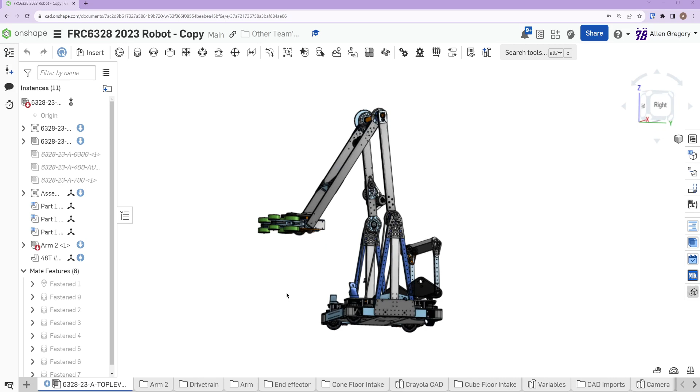Tonight we're looking at Team 6328, Mechanical Advantage. They had a fantastic robot this year. It was rather cool, so we're going to look through their CAD and see how they did it. Just like the robots in the design recaps, we'll go mechanism by mechanism, normally starting at the bottom and going up.

Looking at their swerve drive, it's very similar to our drivetrain for the two robots we built this past year, where they have the same swerve modules, the MK4i inverted modules. They are using NEO motors instead of Falcons, but that really doesn't change much in how the modules get built or anything else. They have the little 3D printed corners that we also use.

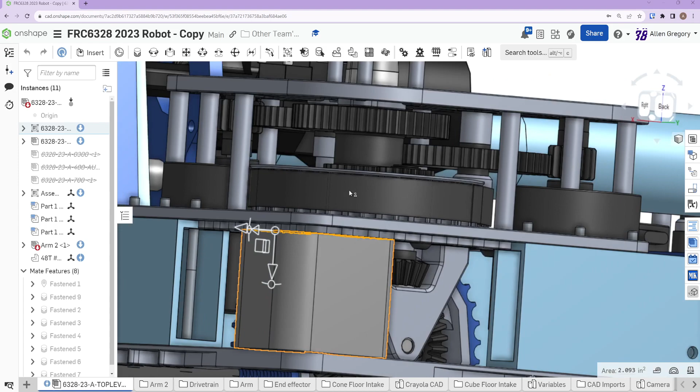Theirs are a little bit different actually, which is interesting. They go around that center standoff, which might be something we do. We currently wrap it with the 3D print where we just have a circle and we press it in, so it's the only bolt that goes through our little corner, where they just come in and put two more standoff features into two outside bolts. I wonder if they drill into here. We had considered that on one of our setups for a couple things. This flange is a little bit thin, this web here in the part.

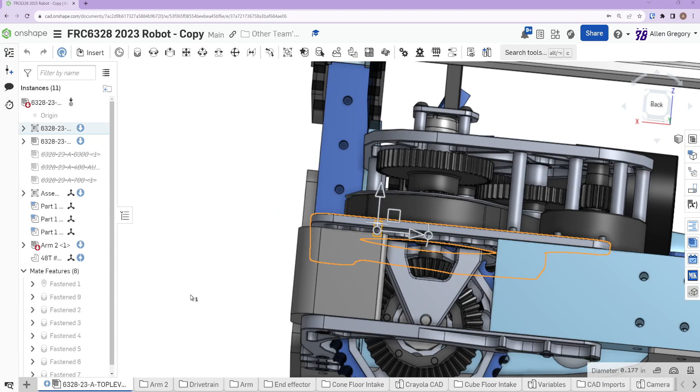It gets milled out by SDS when they ship it, but you can drill and bolt into that, so they could do something like that. Because this is a threaded hole in the SDS module, so there's a bolt going down into here somehow. I don't know if it goes all the way through. They might just bolt it into the 3D printed part. You could do that if you wanted to.

So those, it's pretty decent. Oh, it's on the other side, there's the hole. So it's a relatively wide hole, a .266 hole on the inside here. So what I think they do is this part gets an inserted nut. Yeah, it has that little recess here, so it's probably a heat set insert or a screw expand insert that goes into here, and then they just bolt those in from the top of the module, so there's nothing supporting the bottom most likely.

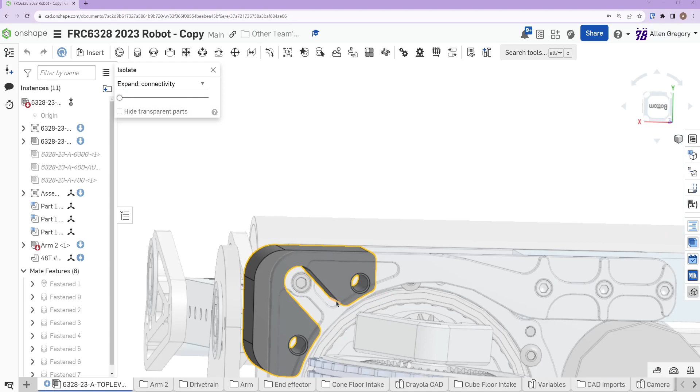They could put another insert and drill a hole, but that'd be really hard to do right here where it hits the rib, so they're probably not doing that, at least on this side. But you don't really need to, this doesn't have to be anything all that structural. Just bolting in from the top works pretty well, and then you don't have to remove the standoff to take it on and off, which is pretty nice, and you can make this part a little bit simpler to make.

It's just a single 3D printed part, that's a little bit easier. We might actually start doing something like this, it saves some time, because we had some issues with ours breaking and stuff. These would be easier to replace if you just undo those two screws.

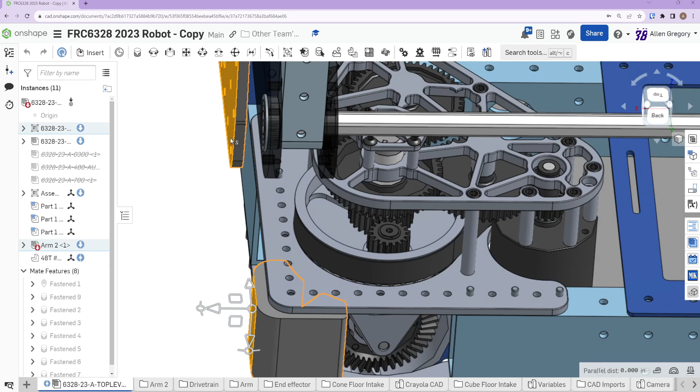That is a small feature, but already pretty useful and cool. So what these things do is help make your frame perimeter flat out to here, so you can meet all the bumper rules about how close your bumpers have to be to the frame, and how many gaps you can have in things. These corners fill out your bumpers a little bit, and make it much easier to be compliant without having to change your bumper geometry. They only pushed it out on one side where they have this plate. They left it small on the other side because it's fully flat back here, there's no plate mounting here, so they just left it basically flush with the swerve module. So that's pretty easy to do.

They did a somewhat similar battery mount to what we normally do. We don't have this rail crossing here, so on our robot we have to have little standoffs coming off, but having the rail makes it really simple. You're able to put the battery right there and strap across it.

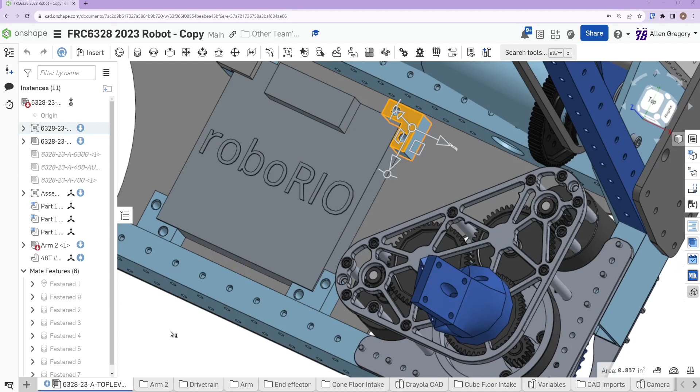Let's see, yeah, they have some of their other electrical. This is an interesting way to do the RoboRio. These little blocks kind of frame it in, and then they have smaller blocks that they screw down on top of it to basically clamp it down. For the most part, we just use VHB tape, double stick tape, on the bottom of ours, and stick it down, and it holds up quite well. We haven't had any issues. But something like this would make it easier if we ever had to swap the RoboRio. Having to pry up the VHB tape is kind of annoying. Where this clamping setup, you would just undo some screws and you could swap it in and out.

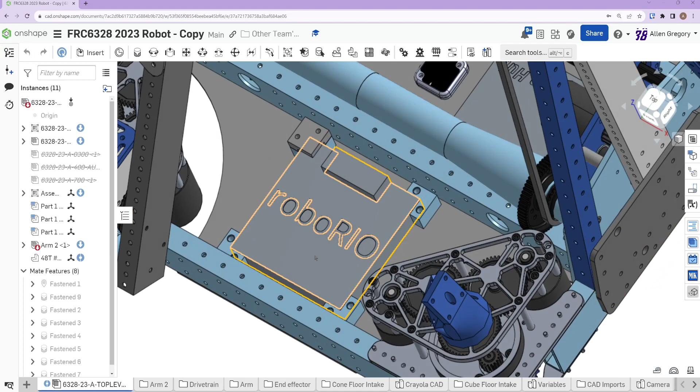So that would make the repair a little bit faster. Most of the time, if we have to swap a Rio, we probably have enough time to either pry it up if we have long enough in between matches, or we might just put another one on top of it, plug things in, and go to the match. We normally try to have at least a little bit of weight margin so we can do that without being overweight. So you can just unplug everything, plug it in on top, and strap it down with VHB or zip ties or whatever else you need to get it to at least stay for a match.

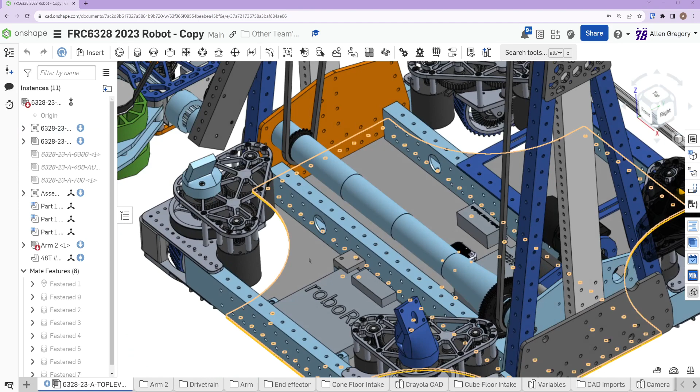Looks like they also had a steel belly pan, either steel or aluminum. Probably most people's this year were steel. 1/8 inch could be steel or aluminum. We could go check if we really wanted to, in like weight properties. See if it shows up. 6.7 kilograms. So I'm not sure if that's steel or aluminum still, but either way it would work. So if you need some extra weight down low, you could make it steel. If not, you can make it aluminum.

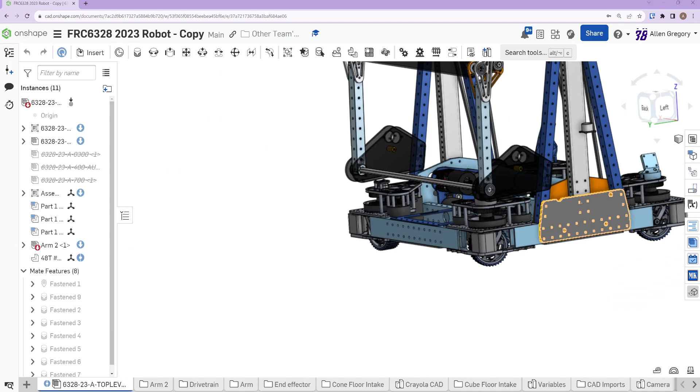They have these full circular arcs down here where we have kind of like straight line cutouts, but nothing too different. Where they actually start getting quite a bit different is where they mount their superstructure. They build it all off these two main plates on each side that pretty much mount the whole rest of their superstructure. So their chassis is basically fully separate. Instead of having that whole mounting rail system or mounting in multiple places of the chassis like we did, they just have four rather large mounting plates that build up a support rod on each, like a 2x1 vertical support.

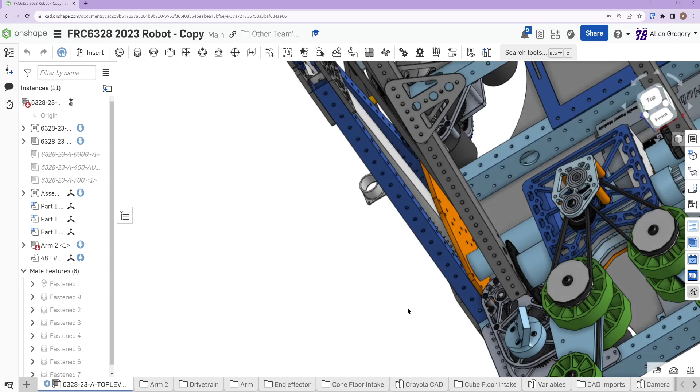And then the two angled A-frame supports in between them. Let's see, so they're not too much longer. Yeah, so they're actually pretty small. This robot's 25 by 25, so it's pretty narrow. Ours were 27 by 24, so we'd have a little bit more room between our swerve modules if we wanted to do something like this. You could have these tubes be angled out a little bit more for a little bit more support, and these plates would get a little bit bigger.

So that's the structure of what is their arm supports, but we're going to skip over to their intake. This is actually really useful for a lot of swerve drives and swerve designs. Something like this could help a lot, because one of the tricks we talked about for our off-season robot was how do you actually mount over the swerve modules. It's often pretty complicated with the MK4i because you don't have a lot of mounting support up there. There's some teams who will use nut strip mounted to these bolt holes on top, and then you can mount some plates onto those.

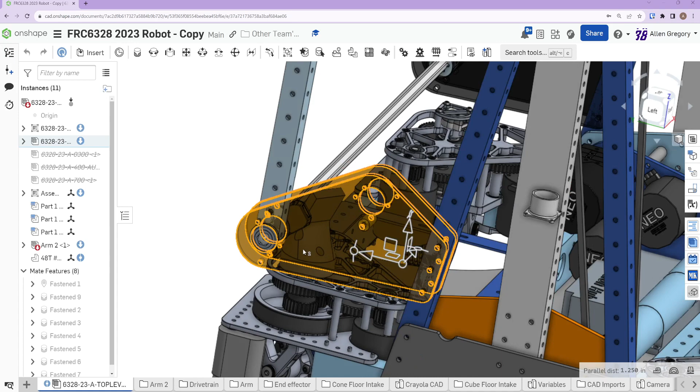That works a little bit, but then everything's integrated into the swerve module, so if you ever need to replace the swerve module, you're unbolting parts of your robot to do that. Even maintenance gets a little bit harder as you bolt things to the swerve module — it's harder to get in, keep it clean, and swap belts or anything when there's stuff mounted around it. So these polycarb plates that they have mounted to the A-frame are able to just overhang the swerve modules enough to be the pivot for their cube intake.

This is rather simple, and it works pretty well for any game object where you can have this high of a pivot.

They didn't need to try to drop it any lower down near the swerve module or anything. It's hard to get too much lower than the swerve module anyway. They can only go a little bit lower if they wanted to, but this lets us have the shaft pretty close to the front of the robot and still reasonably supported.

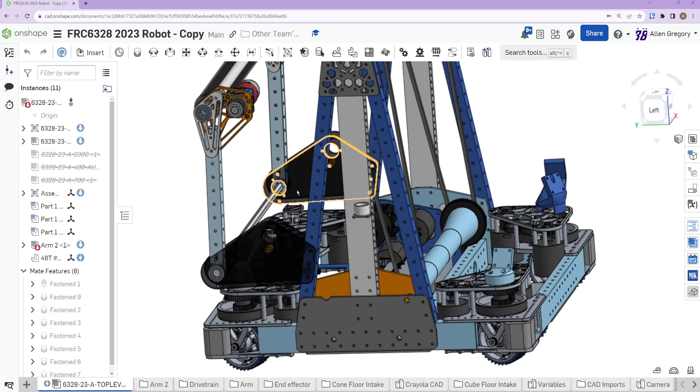By those modules. And because you have these polycarb plates, you get a little bit of compliance built in, so that if something does come in and hit this from the side, these plates are able to bend a little bit just because the polycarb is flexible, more so than aluminum. So they can take the shock pretty well. They can take the impact. Polycarbonate is very impact resistant.

And so you shouldn't have too many issues with something like this breaking. If you wanted to, you could stiffen it up with more standoffs across here. So they only have, in CAD at least, this one, and they just have the hex shaft running straight through it. If you had a standoff a little bit closer, you could make it a little bit stiffer between those as you make the sandwich. Have more standoffs between it. This whole assembly gets a little bit stiffer, which if you started to see too much flex, you could do.

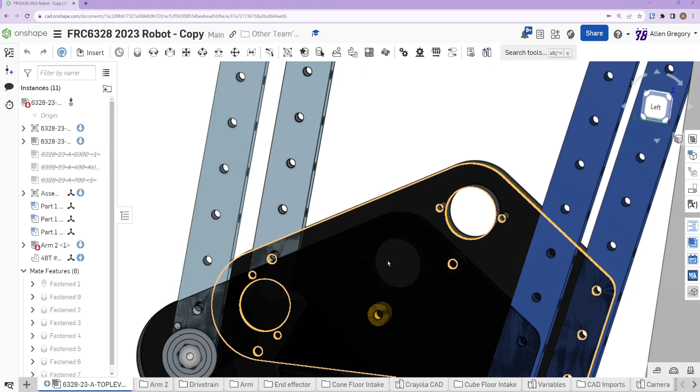It looks like they had another bearing set up here, so this might have been for a different iteration. This might have been for a motor mount of some kind. It's very possible they just designed in a different intake at one point that used another rod or something, so it got left over in CAD.

But they just kept it because this intake pivot still worked. But it doesn't look like anything's there, at least in the CAD, that's visible. So yeah, that's how the intake supports the pivot. How it actually works as an intake, from what we can see so far, is something has to power this hex shaft to be able to power it up and down.

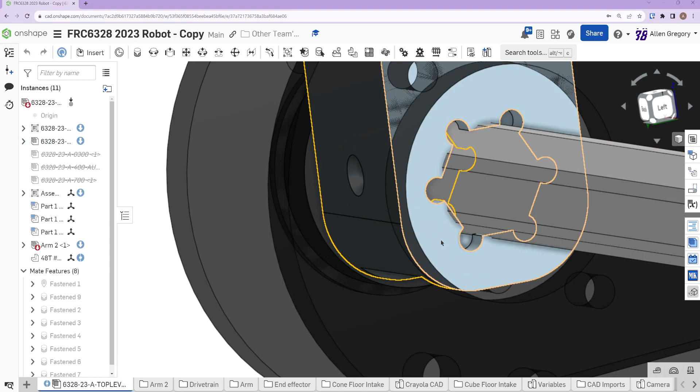So they make, oh, that's actually kind of cool. Let's see. So to actually be able to move it, on their router I'm guessing, they cut the hex profile into the tube directly. They have these circle overcuts because when you have a rounded bit on the router, you have a round cutting bit that's spinning. You can't make the sharp corner of a hex.

So they overcut into the corner with an 1/8 inch router bit with a CNC bit. They're able to do these overcuts into here. And so this gives space for the hex shaft corners to fit, or the rounded hex shaft corners to fit. And then you can transfer all the torque on all these flat sides to the 6 flat sides of the hex.

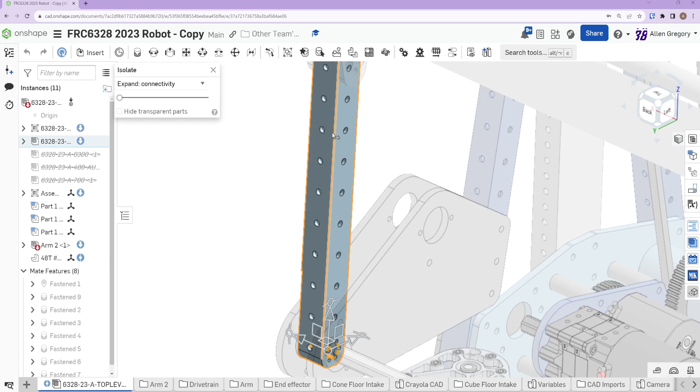And so as the hex spins, the arm spins, and you get a really tight, light package because you don't have to have any hub or anything, and you can still just run the 1x1 out to have nice, easy mounting and relatively strong structure compared to just a flat piece of polycarbonate or flat piece of aluminum. The tube gets you a pretty stiff structure out here that's very easy to mount to. You can just bolt or rivet. So cutting in the hex pattern on the router is a pretty clever way to do that.

What we don't necessarily know is how they actually power the pivot. So they have to have a motor somewhere to spin this. My best guess and what I believe is happening is this Neo and Max Planetary over here that doesn't seem to be attached to anything else is powering this somehow. So there's either it...

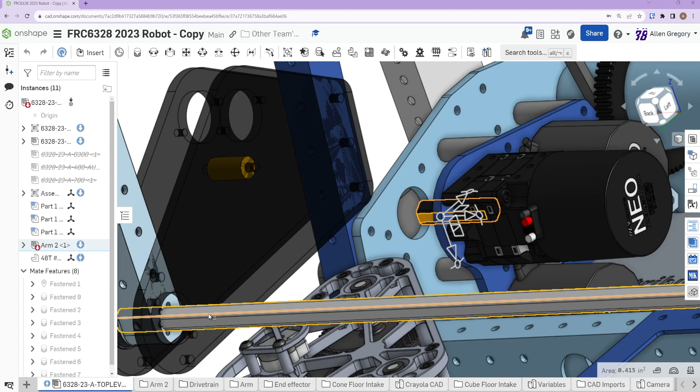Doesn't quite look like you can fit a belt directly here. So it's possible maybe that this is what that's for. This might be like an idler. So you have a shaft running through here that has a pair of pulleys or sprockets on it. And this shaft runs up to this one, and then this runs down to this. That's a very possible way that they're doing it.

They could also have a motor mount somewhere on here that just directly does it, that just didn't get into CAD. A lot of times things like that change throughout the season, so you don't exactly know how teams' robots work just from CAD, because not everybody's CAD is fully detailed everywhere. So even though they didn't CAD the chain here, we're almost certain just from context clues that something is powering this hex shaft. It just didn't get into CAD, or it's hidden in this version of the model, or something like that.

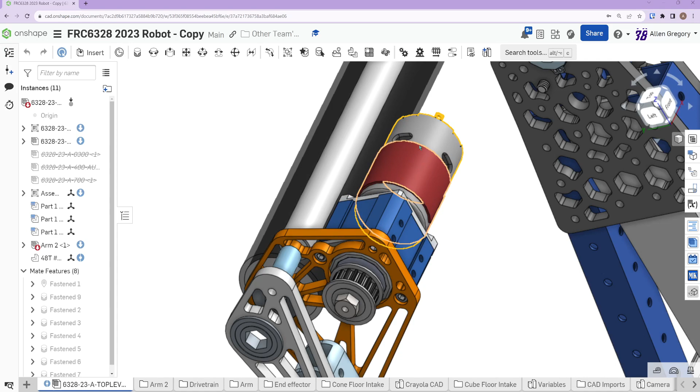The other part of the intake is the actual roller itself, and they chose to use a non-brushless motor. They're not using a Neo or a Falcon up here for their intake. They're just using one of the AndyMark RedLine 775s, which are similar, or at least similar in the model, to the 775 Pro motors. These were very common on intakes forever.

They're still pretty common on intakes. The advantage is they don't have any sensor wires, and you don't have to run the CAN bus out to this or anything. You just have to run power to it, and you can run the power back down to a Spark Max somewhere.

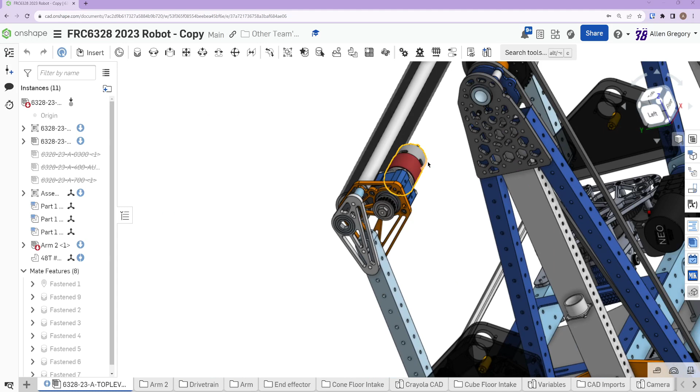They're just brushed motors, so they don't need any of that advanced logic or anything. You don't get the encoders or sensors that you get with a brushless motor, but it's a little bit lighter, a little bit easier to package, and there's less risk with fewer connectors or wires out here failing and messing up.

A lot of teams will use brush motors if it has to be all the way at the end of the intake, like this design is, where you have the motor gearbox right above the roller. When this is deployed, it's going to be pretty far out there, so another robot could run into it, or if you ran it into something exactly right and bent this bar, you might hit the motor. You may not want to have a Neo or a Falcon out this exposed on your intake.

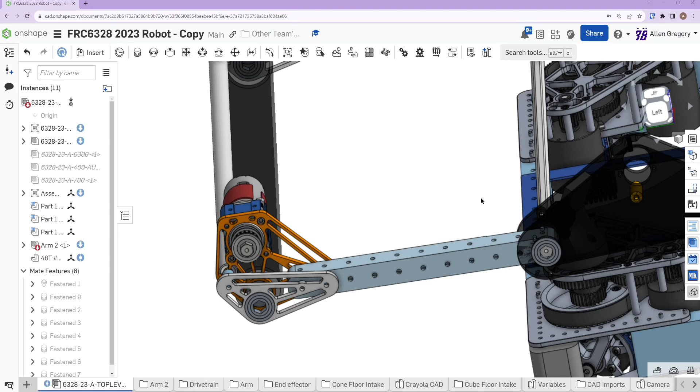A lot of times you do this just so it stays out of the way, so the cube's going to come up inside it, on the inside here. The cube doesn't ever touch the motor here, whereas if you put it farther back, the cube might run into it. So it ends up being nice and easy to put out here.

You also have a really short belt run. You have the belt on this pulley here. There would be another pulley that's not in the CAD or modeled in this version that we're looking at, so there'd be a pulley here and you'd have a really short belt. Short belts are great - it's very hard for the belt to have a lot of time to skip, because you can keep tension on them very easily.

What's the best way to describe this? The amount that it would need to stretch for it to be able to come over the flange is a much higher percentage of the total length of the belt. So it's much, much harder to get it to pop over a flange or come off a pulley when you have a short belt compared to a really long belt.

If you have a really long belt, every little bit of belt has to stretch a little, and then there's enough room for it to come over the pulley or to stretch, and it's just harder to keep everything in tension. It's much easier for the plates to flex between them, even if it's aluminum - it's still easy for them to get out of alignment just a little, and then your distances aren't quite the same. So it's much more likely for a belt over a long distance to come undone if you don't have other ways to tension it than for a really short belt. So you get some advantages there as well.

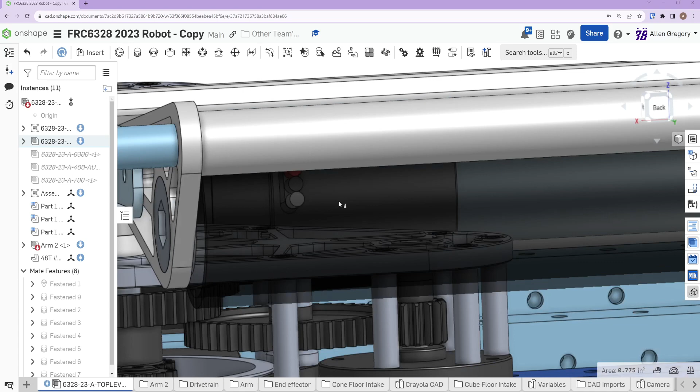Ooh, I rotated too much. Okay, it looks like their roller is just a live axle hex roller, so it's relatively easy. They have the 4 bearings - 1, 2, 3, and 4. There'll just be a hex shaft running all the way through it, and then it's like 1.75 OD or something. They build a hub of some sort.

2-inch OD, yeah, so this might be like 1/8 inch wall plastic - probably 1/8 inch wall polycarb tube, so 2-inch OD. Could be something else, could be rubber. But something's probably, if it's polycarb, there's probably something wrapped around it to be able to intake the cubes nicely.

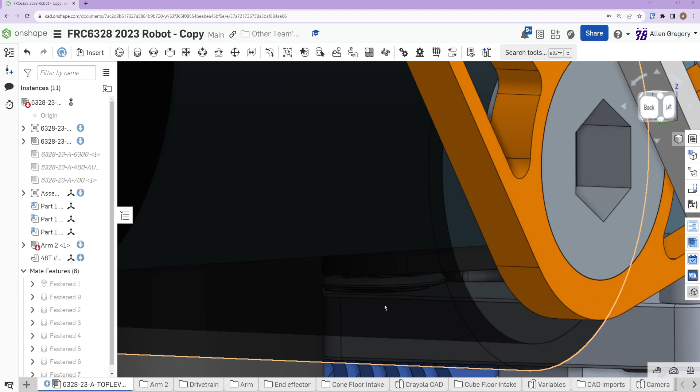And they have some version of a hub that they would put inside of it to attach it to the hex shaft. Normally those are just going to be printed hubs.

Some teams who don't have printers would use wheels sometimes. You would find a hex wheel that fit inside the tube exactly, and then you could screw into the wheel through your tube. You can make a roller that way. But nowadays with 3D printers, most teams can just print any hub they need and make it work very well.

The last part of the intake is this crossbar. So that's just a standoff here and a bolt, and most likely a star nut inside of this tube that they're bolting into. Star nuts are often used on parts of a bike sometimes, but you hammer them into the tube, and it allows you to have a threaded end right in this end of the tube.

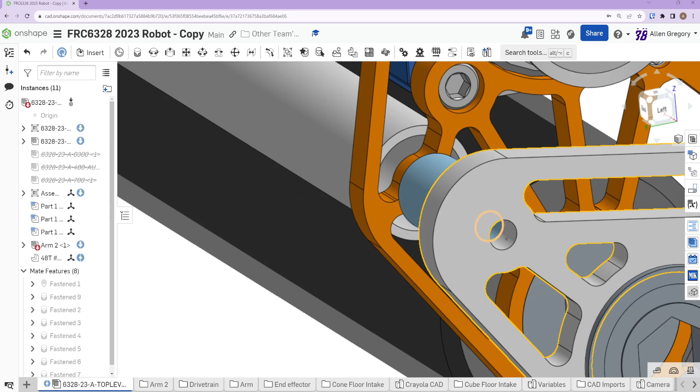It's a .196 hole, so that's a number 10 going through. So if they are using a star nut, they're probably using the Rev star nut, and this is probably a 3/4 tube. So my guess is this is probably a Rev star nut in here with the Rev 3/4 tube or any other 3/4 aluminum tube.

We had some issues with the Rev star nuts where we'd twist them inside if we torqued them too much, so we stopped using them, but other teams have had a lot of success with them, so they definitely work. They allow for a very easy, light, strong standoff going across your whole intake to give this thing structure, so this whole part doesn't rotate, and keeps both ends in parallel so that they move up and down nicely together.

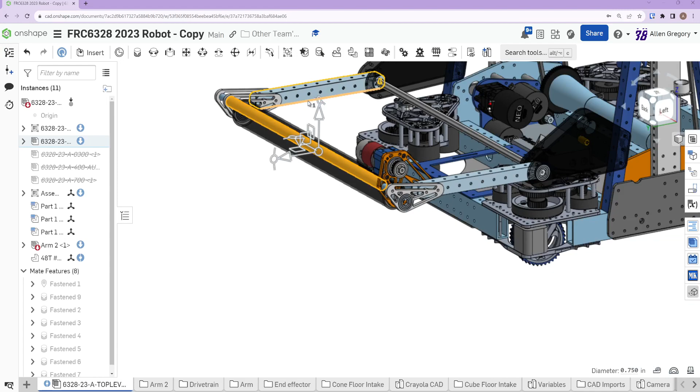It also works as the first thing to hit. If you drive this into another robot or anything, you're not running into your roller. You break this bar first, and it's relatively easy to replace if you bend this, compared to having to replace your whole roller and hex shaft and everything else. So having a front bar to take the impact of another robot running into you, or you running into another robot, can be really helpful on intakes.

All right, we talked more than enough about the intake. Let's move up. I think that's most everything.

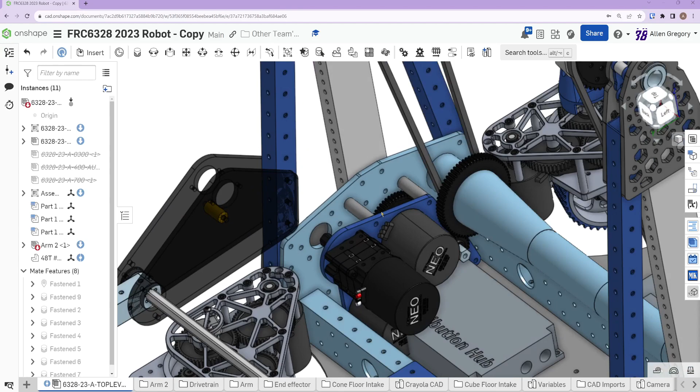So what do they do here? They have a gearbox that has 2 Neos on it. We're going to ignore this one because we believe that's for the pivot on the arm and for the intake. And so these 2 NEO motors here are driving that gear.

Let's see if I can do something useful here. We're going to go into Onshape and we're going to make ourselves a section view. So I'm going to split it out. Do I want to go the other way? There we go, back it up to where we can get the gears.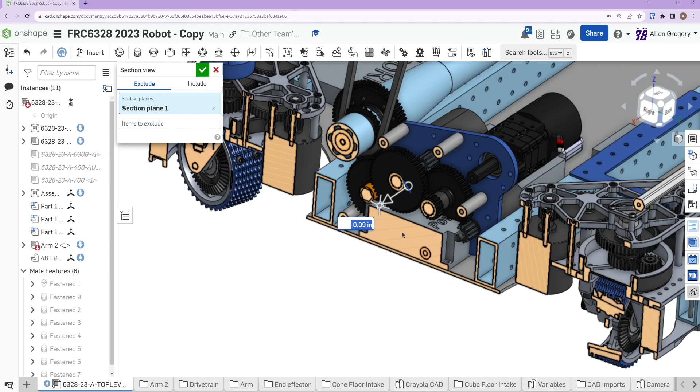So in there we can basically cut away part of the robot and get in to see the gearbox. Some of these things we can see, like there's just an issue with the model - the power distribution hub is not actually here. It's almost certainly just slid over a little bit. Maybe it's on the other side away from the gearbox. That's probably the best guess, is it's just over here. It just got modeled, flipped around. It happens.

So the way a gearbox like this works is they're basically just trying to get the 2 motors to spin at a much lower speed and have a lot more torque, rotational force, to be able to move the arm in a very controlled manner.

So they start with 2 really small gears, one on each motor, that are called pinions. Except I'm doing section view still, which is not what I want to do. Let me check that. There we go.

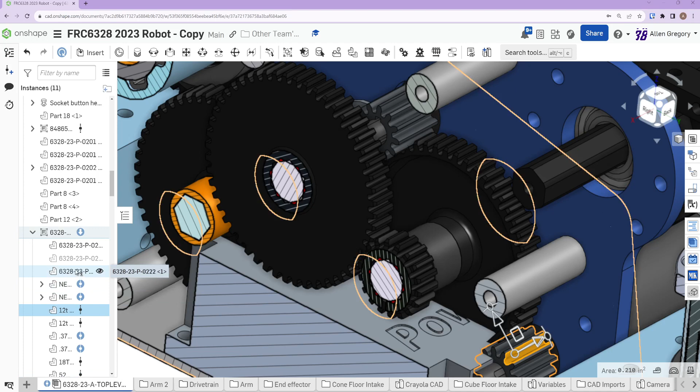Okay, so they have pinions here and here. We can look in the arm real fast and we can see exactly what it is, and we could calculate the whole ratio of this gearbox if we wanted to. So this is a 12-tooth gear, there's another one here, and they're driving this larger gear, this 52-tooth gear.

We've talked about this a couple times, but it's always good to go over again. Basic gear ratios mean that as this 12-tooth gear spins and this 52-tooth gear spins, for every 52 over 12 times that this one spins, that one spins. It's a little over 4, right? Because 4 to 1 would be 48 to 12. This is 52 to 12. So for every 4 plus a little bit that this small gear spins, this big gear is going to spin once. So it's slowed down more than 4x from these.

And then we gear it down even further, because these 2 share the same shaft, so they're spinning at the exact same speed. And we go down from this gear, which is an 18-tooth, and it's driving another 52.

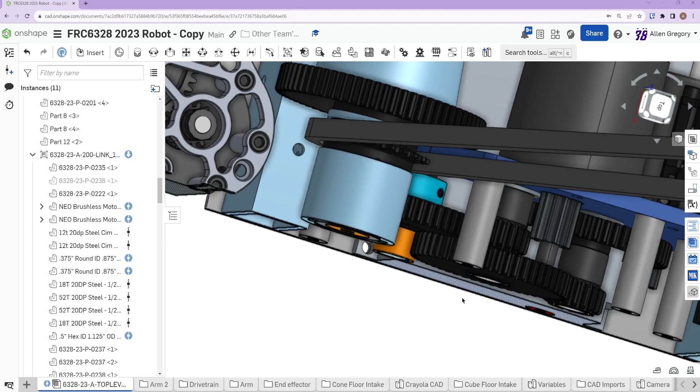So we gear down even more, 18 to 52, and then there's a whole other gear set. This is actually 4 stages total. We have the first gear reduction here, the second stage here going from this small one to this big one, and the third stage back here where we go 18 to 52 again. So part of the design is they used all the same gear teeth, which worked really well. They went 12 to 52, then 18 to 52, then 18 to 52 again.

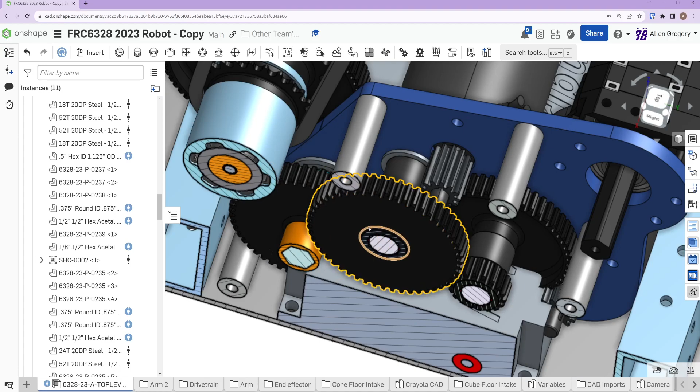That lets you buy the same gear over and over again, so you have spares. It lets you do all your math easily because you're typing the same number over again, and if you can package it all, it works pretty nicely in a setup like this. So that's gear stage 3 going 18 to 52 again, making it go even slower. And all these multiply together.

So if this is 4 to 1, we'll call this 3 to 1. You get something closer, above 12 to 1. We could do all the exact math, and then you get something even higher, over 36 to 1. And then they come out on the last stage here and go 24 to 68.

So there's a 4-stage gearbox to drive this arm, starting at those small gears on the motor and going through each stage to get a lot of gear reduction, to be able to move the arm smoothly.

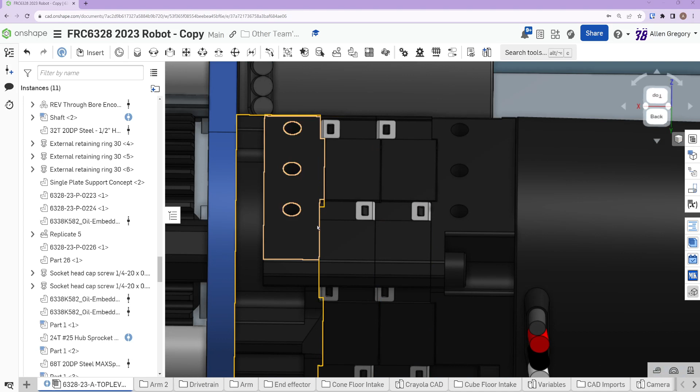Similarly, you can do things like using the MAXPlanetary gearboxes. That's what we did on our arm on FRC. Those gearboxes were set up with two 5-to-1 stages in each one, so there's like 25 to 1 in the gearbox. And then we had a chain and sprocket that let us go another 4 to 1, for an overall 100 to 1 reduction on our arms. These ones are probably a little bit bigger once you account for the final chain reduction here.

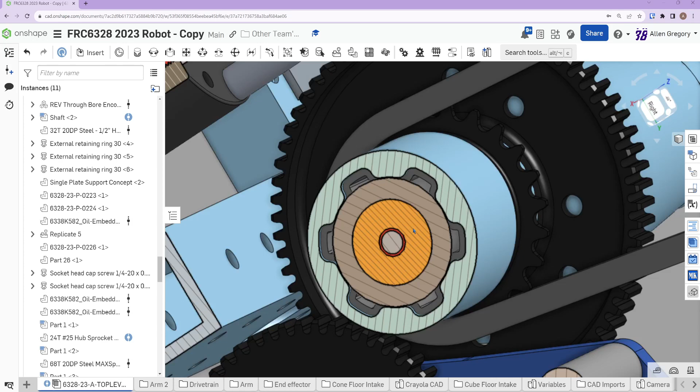So you get this final gear reduction, like 4 stages of gears. They mount into this rather cool MAXSpline assembly here to actually power their arm. And so the cutaway actually helps a lot here so we can see exactly what's going on. They have some spacers, but they have MAXSpline sprockets and MAXSpline gears.

Some other stuff, what they do, they've made some 3D printed spacers probably. Yeah, so it's just a big 3D printed MAXSpline pattern spacer here. It goes over and clamps this side of the gear nicely in case anything ran into it or something. I don't think, yeah, they're not bolting into it. It doesn't look like they have bolt holes there.

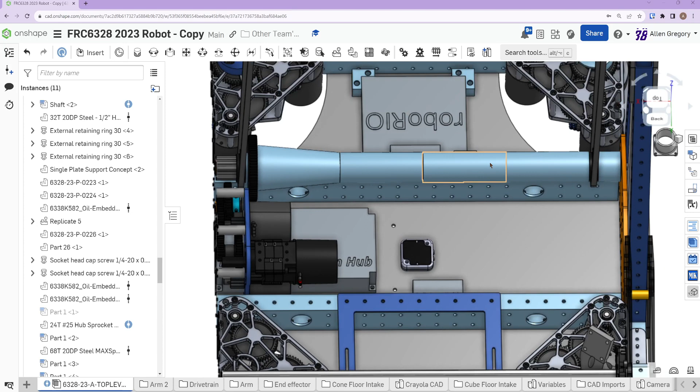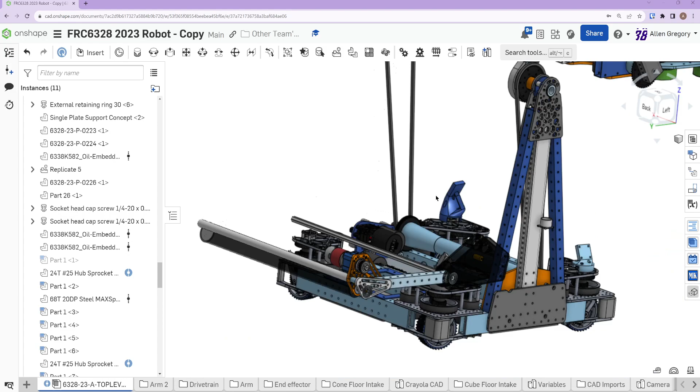And they just have a few more of these spacers that they printed out to keep the spacing along the MAXSpline, to go to the other side for the other sprocket. So both these sprockets are driving at the same time to keep the sides in sync, which is really important here because there's not a crossbar here since the upper arm has to swing through. If these chains get off, this whole assembly can angle away from itself and not be clocked at the exact same spot, so it may not line up together if the chains get off. So you want to make sure that they're completely synced at the bottom by having them run on this large MAXSpline shaft.

What are we gonna do? I'm gonna turn off so I can edit section view real fast. Oh, nope, I edited the section view not the way I wanted to. Let's come back here, let's see.

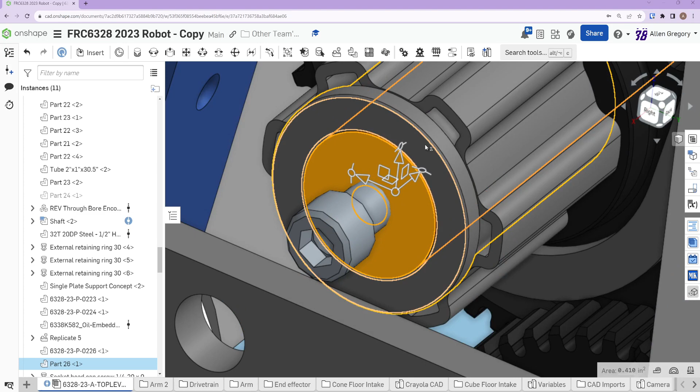Okay, so, oh yeah, you can only see it for a little bit. So they ended up putting... let's hide parts and see it. So inside the MAXSpline, it looks like they just put a rod and bushing. So this is a, yeah, so this is a full bushing that was made somehow.

So yeah, this is a McMaster part. The MAXSpline tube can spin on this bushing because the tube through the center is running all the way through. And so that was the part I wasn't sure about, and so we can load it as we investigate.

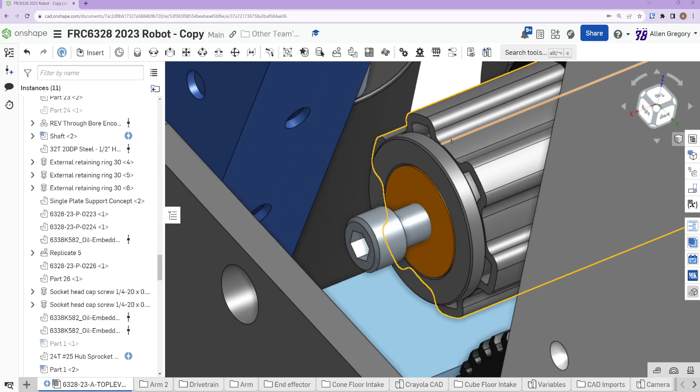Yeah, so they have just a solid rod here, 3/4 inch solid rod that they probably drilled and tapped. Yeah, so it's probably fully solid, they drilled and tapped the ends. Then they put these bushings on top of that, so it's just the bushing, and then this bushing goes on top of that, and the MAXSpline tube spins there. So these are basically fully clamping that plate that I hid.

That gets you a really strong shaft going all the way across the robot that's not spinning at all. Then you have those two bushings on top, and the MAXSpline spinning on top of those. Depending on which has the slightly lower coefficient of friction, probably the MAXSpline spins on the bushing, and the bushing stays still. But it could go the other way, the MAXSpline could spin with the bushing, and the bushing spins on the shaft below it.

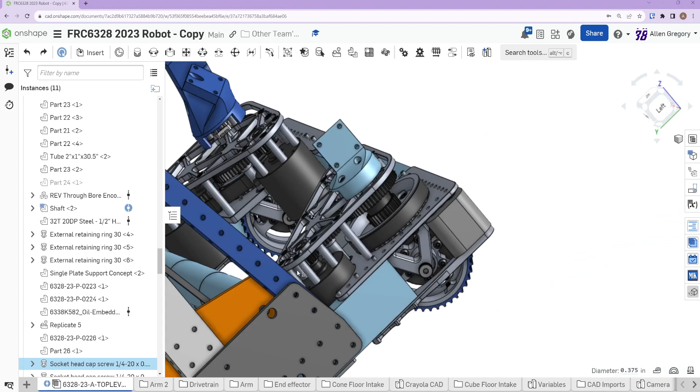The nice advantage of that is if you remove those two bolts, this one and the one on this side, the whole shaft can just come out very easily. So you could replace it if you needed to, or work on it easily, because it's not actually going through these plates at all. There are no bearings or bushings in these plates to hold the shaft in, without having to slide it out from either end. It makes it really easy to take on and off when you just bolt in through the ends like that.

Okay, coming up to the top of their A-frame structure and their arm mounts, I missed one thing down on the intake, and I just saw it up there, so I'm going to go look at it again. Over here on their intake, they have a REV through-bore encoder.

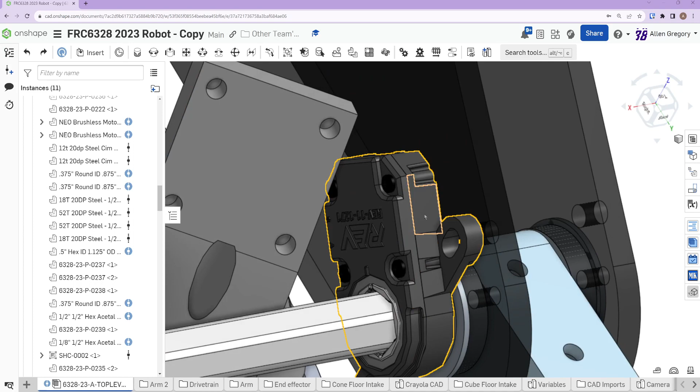This lets them directly sense the position of this hex shaft. So as this moves up and down, they can know the exact position of it and control it really nicely to go where it is.

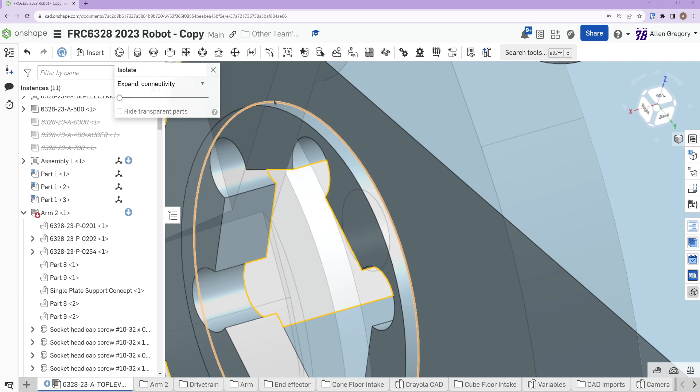They also seemed like they milled the face of this down a little bit so that it could spin easily inside these two plates that only have a 1-inch gap in them. So I missed that the first time, that's why we do these things though. You can see here, most likely on their router, they were able to mill this little bit of a bearing boss to keep it exactly at 1 inch and act like a spacer. And then the rest of it, they milled just a little bit flat, like a 32nd of an inch down, so that it doesn't rub anywhere else along here, so that this face and this face don't rub each other.

They milled it all off, likely on a CNC mill or a CNC router. So that's fun. Okay.

Back up here, they make some rather large plates to hold their whole arm, which makes a lot of sense, this is their whole scoring mechanism. We're looking at these big 0.226 inch, so probably quarter inch aluminum plates that got routed or milled out to have mounting holes for the 3 different tubes, and then some weight lightening as well, as you can see in here.

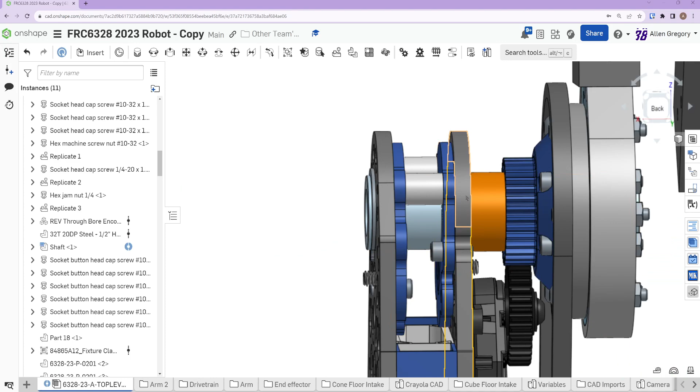And these are how they support the dead axle shafts that the arm is spinning on. So in here, let's see if we can see how this all works. Hide this a little bit. There we go, so we can find the bearing. They have a bearing here, and that's what the arm is actually spinning on top of, this bearing. So the shaft here doesn't spin.

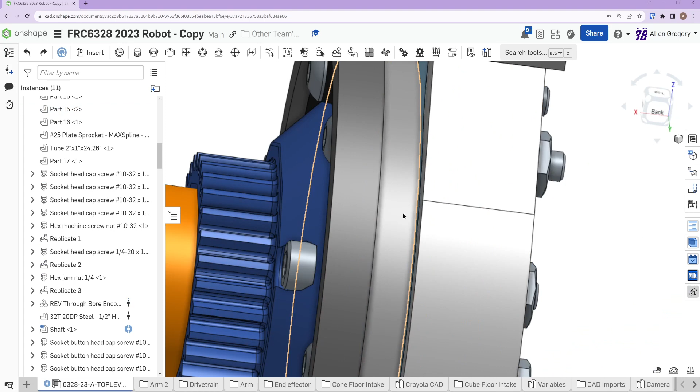And so that plate is supporting the bearing nicely, and most of the load from the whole arm is running through this plate and the bearing. There's probably one on the opposite side that is similar. Yep, so you have another one here and the bearing on this side. So you have 2 bearings and those 2 aluminum plates.

And they're all clamped together with some 3D printed stuff going on. So you have some cool 3D printed stuff like this, you can isolate that. So you have this arm here, or this inside part of the arm that lets them put these large aluminum plates in that actually do most of the connecting work. They insert into that tube and bolt through it. So this big tube here that's going to be their arm is bolted to this pivot really rigidly, can't move anywhere else, and it's attached to everything.

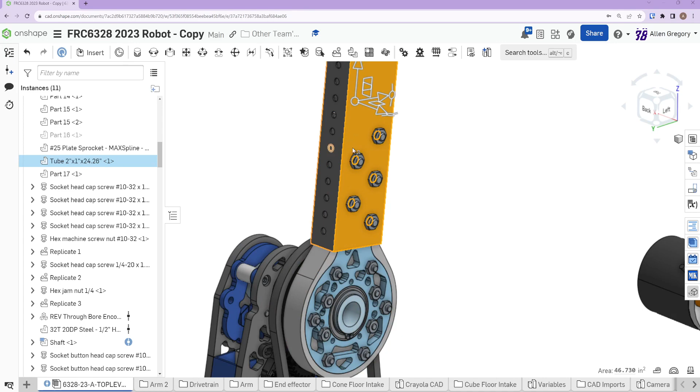And then they do the same thing out with the sprocket, where they bolt the sprocket through all of those plates and everything and attach it so that as that sprocket turns, these arms have to turn as well. We can see what that sprocket looks like if we isolate it. So yeah, it looks like they were just using the REV sprocket, I believe. I think that whole pattern comes on it, if I'm not mistaken.

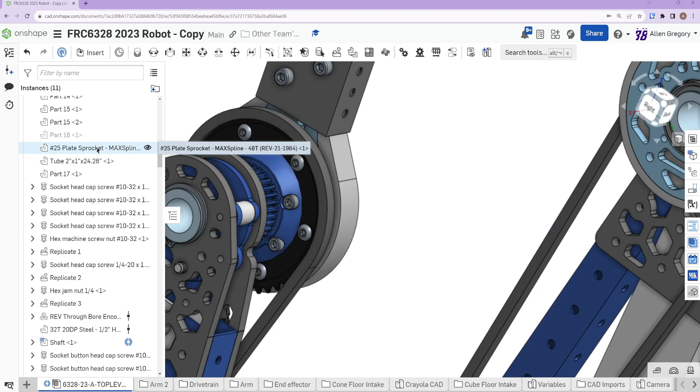The 48 tooth REV sprocket might have at least some of these outer holes in the default pattern, so they could be ready to go. They might have had to drill some of them, but maybe not - those might come stock. Either way, you could drill them if needed, or use them if they already exist. Having bolts towards the outside gives them a much longer lever arm from the pivot, so you have more control.

You're less likely to break any of the bolts. Then they attach down here a gear that lets them have another absolute encoder or through-bore encoder, so they can know where their arm is even if the motor state changes. They don't have to just zero it at the start and track position like we did with FRC. They can boot it up in any position, and this encoder tells them where the arm is, so they're good to go back into their home states and positions using this encoder to get data.

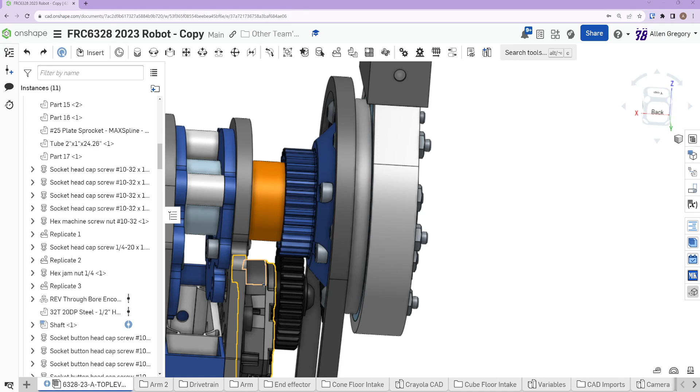There is another really cool thing in here that I just noticed, which is hard to see. They are using what appear to be like Mitee-Bites, or maybe custom ones - no, they look like fixture clamps. This is actually really clever that I did not know before I opened this up. Let me get a better view of these fixture clamp bolts.

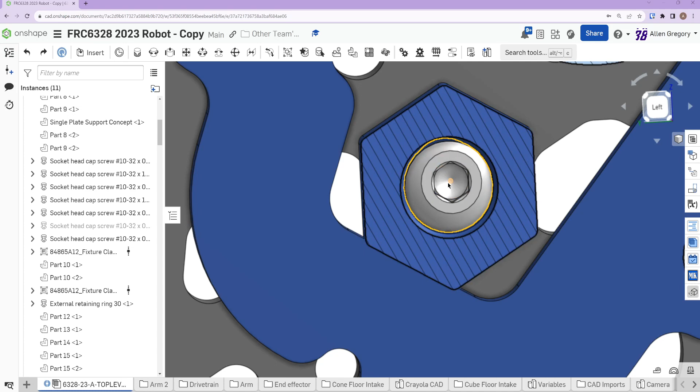Okay, so these bolts here are the same type we use on our CNC router tube clamp to be able to clamp the tubes down. They have this eccentric shape to them - that's why the center of this bolt isn't centered on the bolt head, and it looks wrong, like it's manufactured wrong. But it's built that way so that as you turn and tighten this bolt, you change the distance that this hex is away from these plates here.

You can do that to push the mounting tubes of the arm out away and be able to tension the chain somehow. So you can change the position of that tube, and then you can change the position of the chain, and make the chain as tight as you need to. But I'm not entirely sure which direction they're able to do that in.

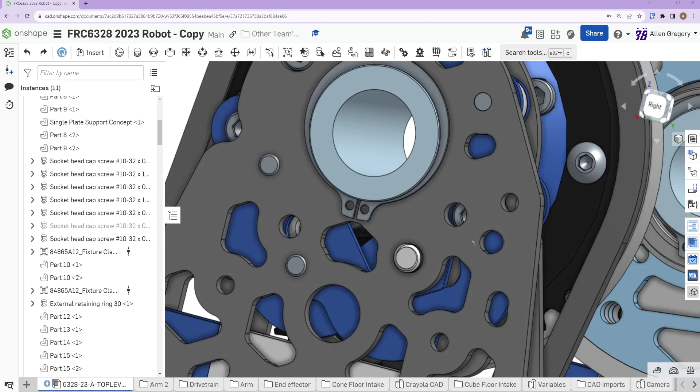So let's see, by tensioning that, what are they changing? So the bearing doesn't slip into there. Let's see - oh yeah, it looks like that hole is just larger. Is there anything in there? No, it looks like that's just a semi-large hole, and that lets them change the location a little bit. You can see it's not quite the perfect shape we'd expect.

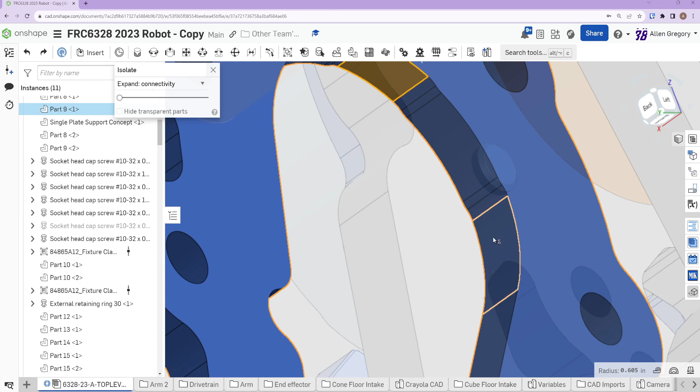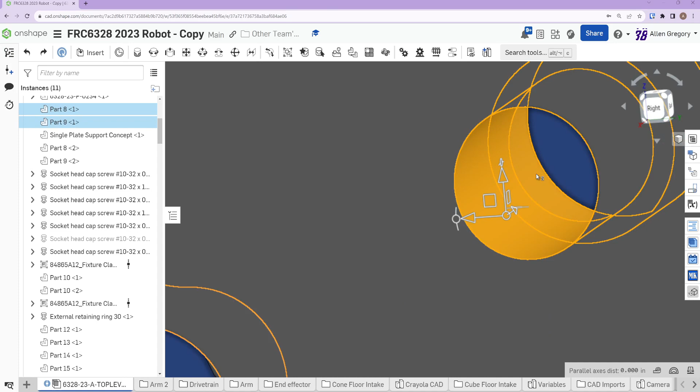Oh, I know what it's doing, I think. So it's pushing against... is it pushing against this tube, possibly? Nope, those don't touch, that's not what it's doing. So you can tension this, but it would push it down, not up, because the chain tension is going to be pulling this down.

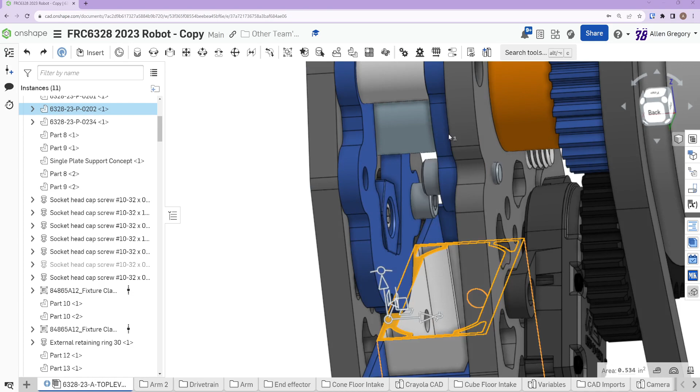Okay, now I get it. The chain tension here is going to be pushing this down, and I think because it's cantilevered, right? So it's cantilevered out here and all the force is coming down this way. As you push this side down more, as if we were to pull this blue tube down really hard, it would angle this side up and give you chain tension - I think that's what's happening. I'm not 100% sure, they might have answered this in their build thread somewhere, but I don't think I ever saw them talk about it. That would make sense though - as you pull down on one side or the other, especially if you make them opposite, pulling down here and raising there, you'd definitely get a motion upwards here to push away from the chain tension.

It also might just be for some sort of alignment. I'm not entirely sure how they do that, but we can ignore that for now.

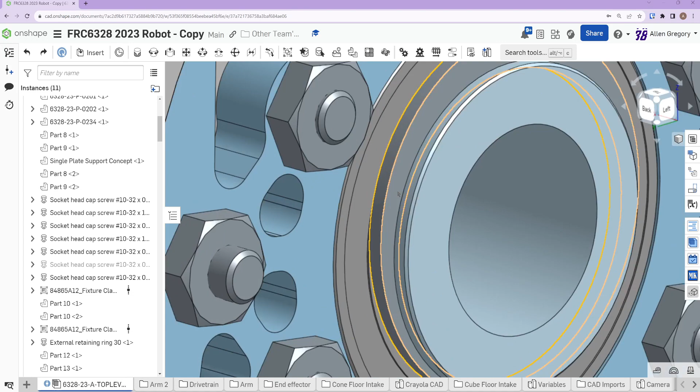The rest of the arm setup is a little bit easier to see. They have the large tube that they use as their pivot, and they want something really thick so it doesn't bend, since it's all cantilevered here and not supported on this side. It's cantilevered a pretty good ways out, with this whole unsupported span before you actually get to the arm. You need something pretty thick so it doesn't bend at all with that much motion and force going through it as they try to move between scoring positions. You wouldn't want that to bend, that would make the robot much, much worse.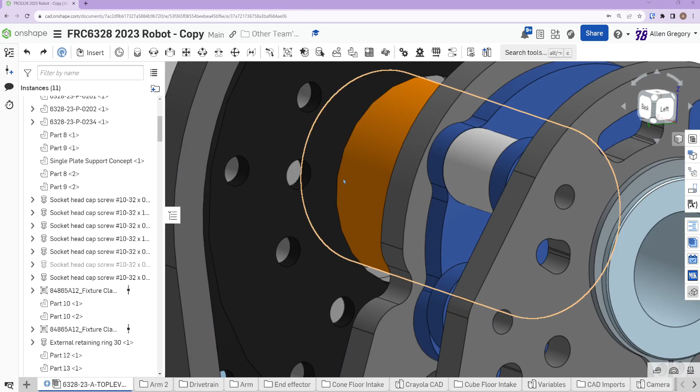That same thing is happening on the other side, just without the analog encoder. You can see the same setup here with a spacer and all the bolts and everything, but a lot of the bolts aren't actually captured over on this side. They were captured on that side, which makes sense if you're worried about clearance somewhere. Just doing one set is easier than doing both if it's a mirrored assembly, and it loads faster too, without having bolts on both sides.

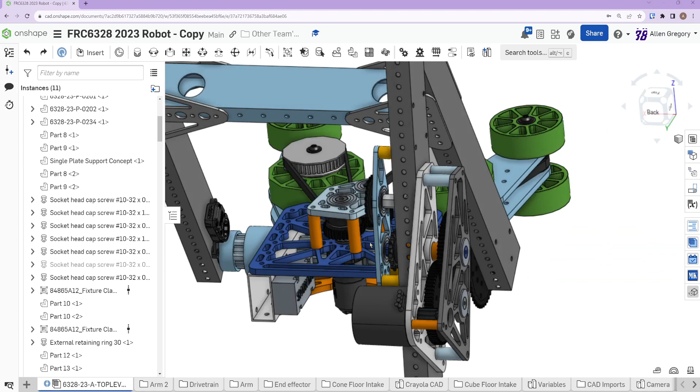This joint is what's powering this first joint of the arm and moving it around, able to swing through and go up or down. They also have another motor assembly here and another custom gearbox driving gear sets, kind of like the one down low. It has a plate that drives through the gearbox over to this side, and we get a sprocket that comes up and powers this sprocket to actually move the second joint of the arm in and out.

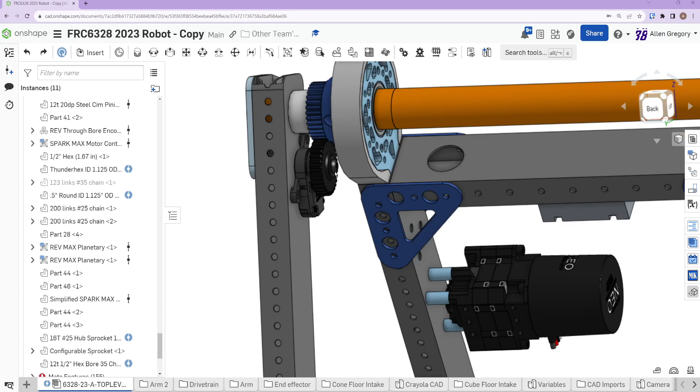I don't see what this sprocket is for. It doesn't seem like it has a counterpart currently, but it's very possible it did. I could imagine this was for a through-bore encoder at some point. Maybe they were doing the encoding down here, but then decided to switch to doing it up here. It could have some other use I just don't know about, but there aren't too many context clues for what that one would be. The main driving here is you have a sprocket here and here.

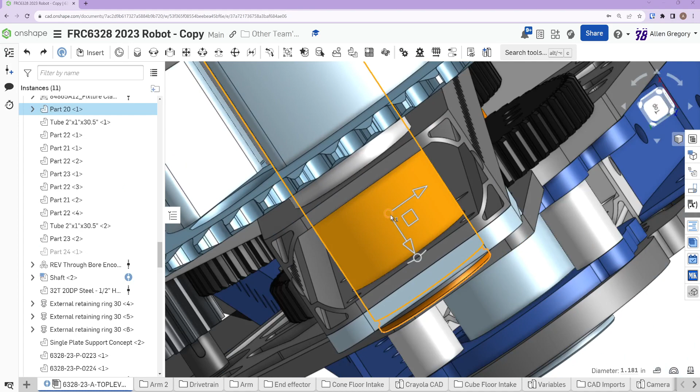They did a similar thing again to be able to put tension in. I'm still not entirely sure how they're using that, that may be something to research, but they have these mic blocks again, which seems like a pretty cool way to do it, mostly because it allows you to get that up and down motion without having to have any sort of bolt in the end of anything or going in the other plane. A lot of times teams have to figure out a way to put a bolt almost in this direction to pull on this tube and tension the chain. That's pretty hard to mill that assembly and get it in there, it can be pretty tricky to make. Where if you can do everything just in the side of the tube, like they're able to do, or into a plate, that's a lot easier for a lot of teams to manufacture.

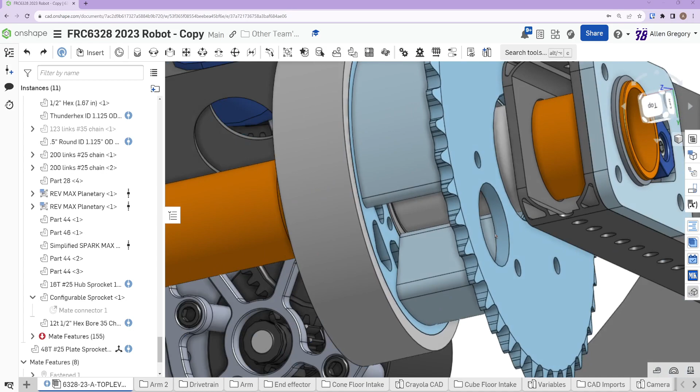They have a nice big sprocket up here to power this. This one is a configurable sprocket, so they might have made it or bought it. They also have a giant hole in it that may be for a wire path or something to go through. I'm not entirely sure what the big hole would be for since there's only one.

It's likely bolted into something like this hub. Yep, you see the holes there, so it's bolted through this printed spacer and then bolted all the way through these same style arm mounting plates they use down here. It looks like they're almost the same part, part 15, part 22. So they say they're different parts, they probably are, but they're very, very similar design styles. You could imagine you could route all of those using a similar bearing and shaft and everything else.

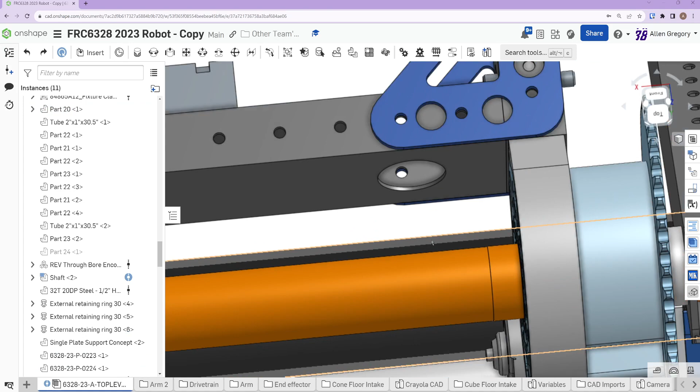I think that might have been a different one. Let's see, it's not the shaft. Yeah, so that is the same. So that's a different OD shaft, let's see what OD down here. Oh no, those are the same. Okay, so yeah, that's the same shaft diameter, but a little bit thinner wall. Since it's going all the way across, it has more support, so it doesn't need to necessarily be as thick as this one did. It also has less weight it's supporting since it's only supporting the rest of its arm, not having to support these two arms and the rest of the intake, or the rest of the arm and everything.

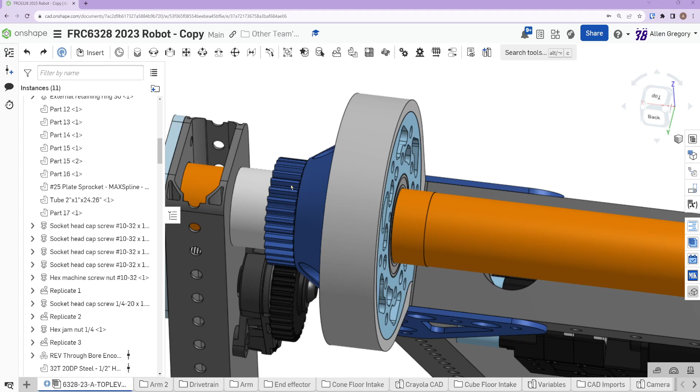Okay, another absolute encoder so they know where this arm is. And then we move down to the final part of the arm and the intake itself.

Up here they have a Neo 550 planetary plus a sprocket. That sprocket's driving a chain way down here. It looks like this got inverted somehow.

In CAD, the sprocket's on this side and the motor and gearbox are on this side, the sprocket's over here on the left. It's very likely one of these two things is flipped around on the real robot so that sprocket can connect to that sprocket easily. It doesn't matter if it's perfect in CAD, as long as you know you can flip it over and mount it in real life over here, that's fine, or have the intake flip around and have the sprocket on that side. Whatever works. And so a lot of times the CADs aren't perfectly detailed to real life.

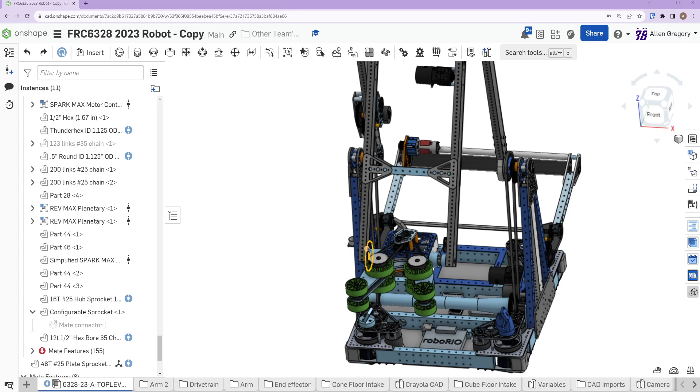You just make sure that your spacing and everything is right, and if you know it's symmetric, you can mount it whichever way you want when you actually build it. So this pivot is doing our intake position, and so they have another Rev through bore encoder. This gap here leads me to believe there's probably another gear on this and a gear on the Rev through bore encoder to let them see the position of the wrist as it's swinging around. So you have to control the shoulder, elbow, and wrist on this arm to know exactly where the game piece is, to drop down and get your cone intakes or get the cones off the shelf, or to pull cubes out of the cube intake. You have to be able to position all three of those really well.

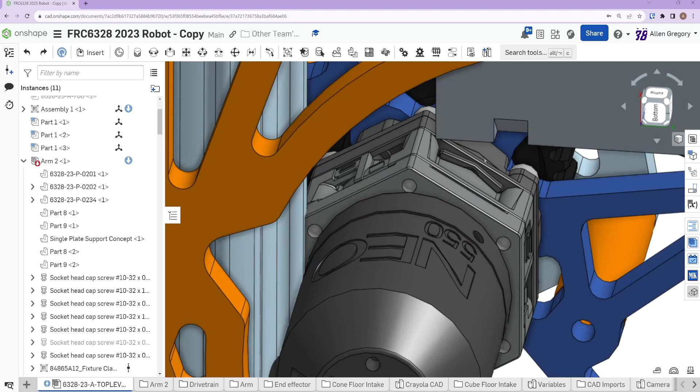And then the intake itself is pretty simple. There's a Neo 550 motor, these really tiny brushless motors from Rev, going into the Ultraplanetary gearbox, which are the same gearboxes that they often use in FTC.

That comes up and powers a gear here that also powers a gear here. So this is the same style that we did on FRC, where you have the two gears that let you reverse the directions. And so you have these two pulleys that then power your set of back wheels and your set of front wheels. This same style intake has worked well for a lot of people to be able to grab cubes in the front one and then pinch cones in the back one.

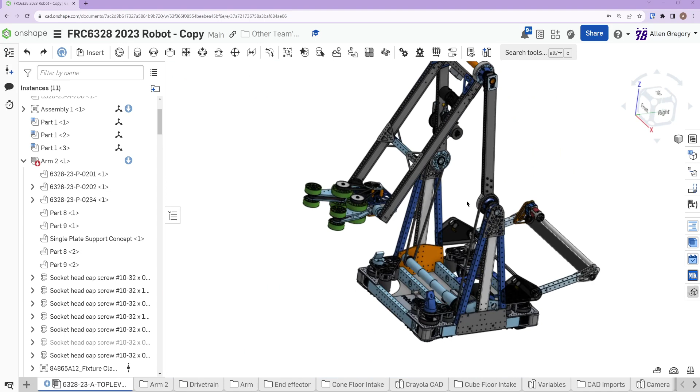And that largely finishes off the mechanical details of their robot. The last thing I want to hit before we end is they also have some of the best programming and autonomous modes in the world, and one of the ways they did that was they designed these cool camera mounts that ended up being their

swerve encoder covers. So like the CANcoder is here, and so they designed these to be able to cover those and protect them, but also mount their cameras. So they would have cameras mounted on these faces. And they were set up so that they could be almost always able to see AprilTags whenever they could.

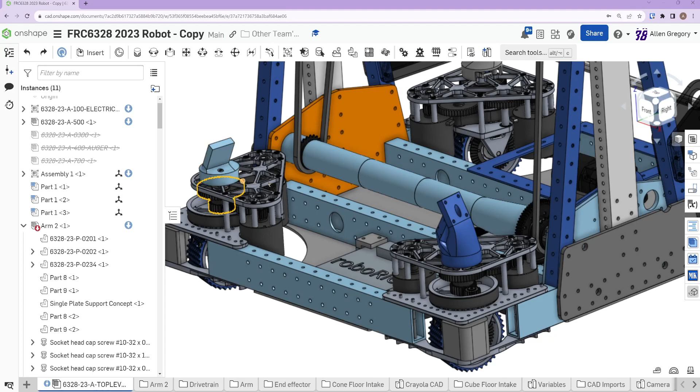So they were able to do a lot of localization, which means they just knew where the robot was on the field almost every time during the match. And from there, they could do a lot of the path generation to automatically have the robot drive in and go to the specific scoring node they wanted to. It made their autos very, very accurate.

So there's another one back over here. And so they had them all just out of the way, right? They didn't want it to be in the way of where the intake was. They wanted the camera to have a good view. The intake comes up and the camera can still see through it. And so these four cameras are always doing a good job of trying to be able to see an AprilTag, even if they're at some sort of weird angle to the AprilTag in the scoring grid. They're trying to always be able to see one.

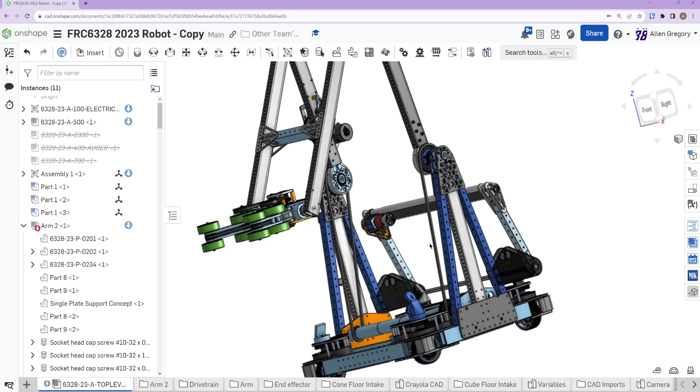And they can do really nice software that way. Okay, I think that pretty much covers their robot.

Yeah, they had a very successful season with this triple axis arm, cube intake, and again, some very nicely done software to get them to have very reliable autonomous modes and fast scoring throughout the match.